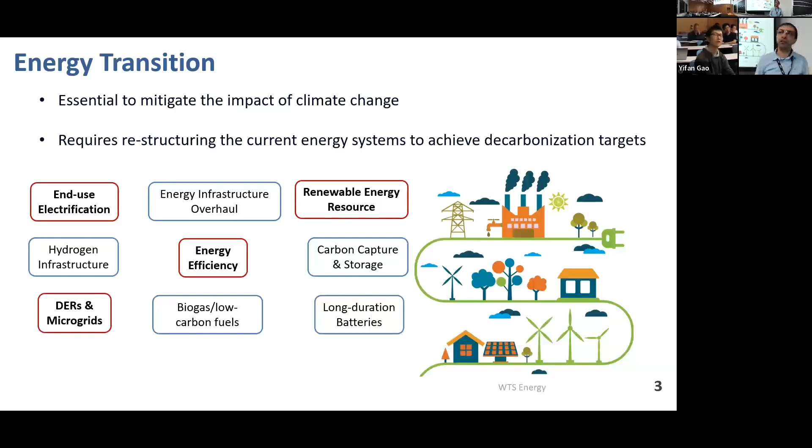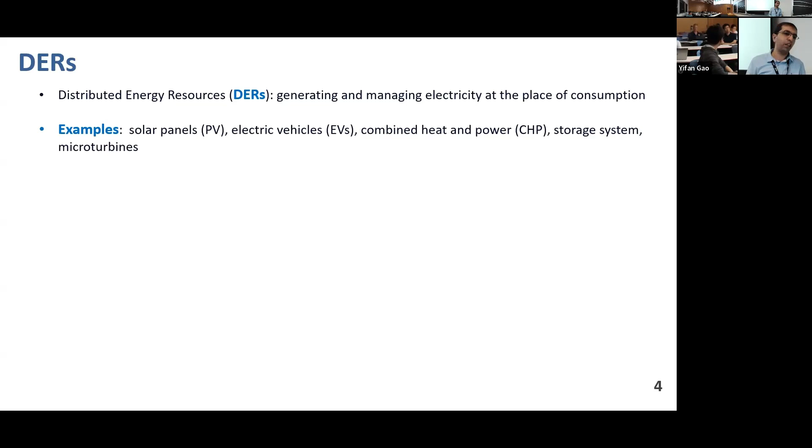So we consider distributed energy resources. DERs are generating and managing systems at the consumption point. Examples of DERs are solar panels, electric vehicles, combined heat and power, and also storage systems and micro turbines and so on and so forth. They offer a lot of benefits. They improve grid reliability and resiliency by decentralizing basically the generation of the power.

They lower the energy costs for households. Thus, they have implications for energy equity and climate justice. They reduce the environmental impact of energy generation by providing clean decarbonized power. And also they reduce infrastructure and distribution costs. By adopting a lot of DERs in households in different neighborhoods, there is not that much need to build a lot of transmission lines perhaps or generation capacities.

But of course, adopting DERs comes with different challenges. The basic one that is also the point of studies in recent years is grid integration. The market and regulations are designed for centralized dispatchable power currently. So adopting DERs is not easy. It needs an update in regulation and policy.

The other downside of DER integration is the cost, the capital cost and maintenance cost for DERs. For solar panels, we can think about rooftop solar panels; they are expensive. Without government incentives, there is not much benefit for low-income households to install, for example, solar panels. And also the maintenance cost for these facilities is expensive.

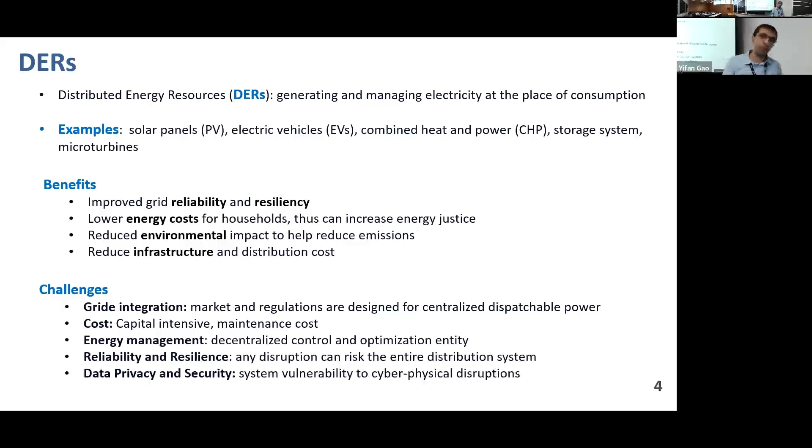Energy management is a challenge for DERs. They require their own control systems to adjust and integrate with other parts of the household to get the most out of these DERs. They also impose some reliability and resilience challenges, and also some data privacy and security challenges as well. For example, if the system is infringed by a cyber-physical attack, the entire transmission line and the grid may be exposed as well.

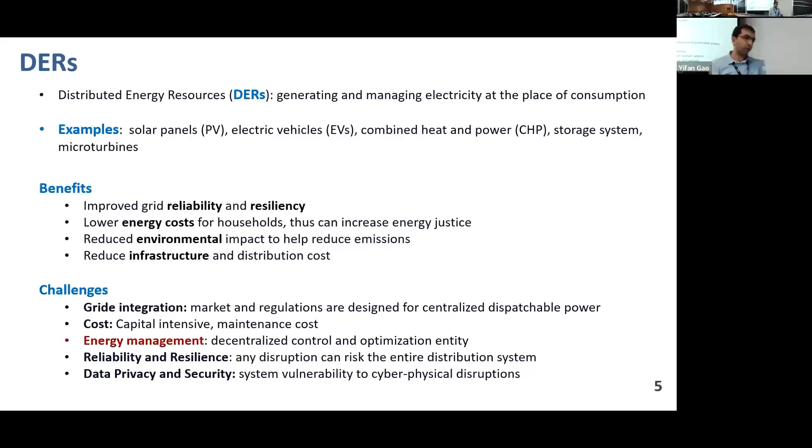So what we consider in this project is the home energy management system. We think about the smart home as an isolated entity, which has some interactions with the outside world through the main grid. And there are different aspects when we think about home energy management. There are HVAC systems. Obviously, we need to satisfy the electricity, heating, and cooling demand for the household or for the building facility. That is the main objective.

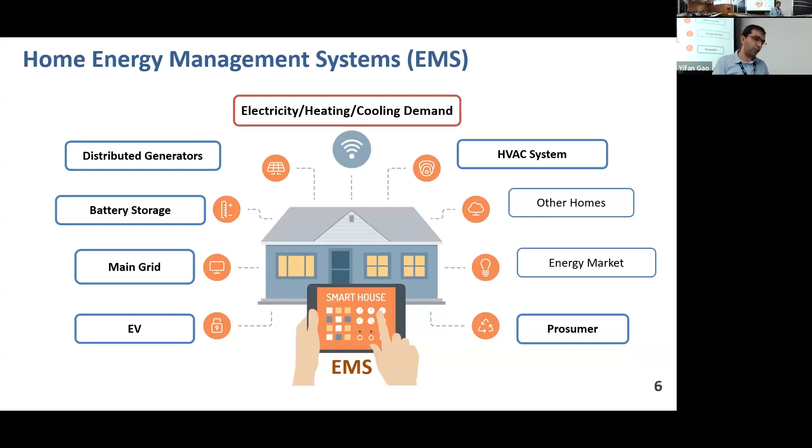And there are different aspects such as distributed generators, battery storage, main grid, EVs. We can think about this building as a prosumer. It sells and buys power from the main grid or to other households as well. There is the energy market aspect, and we can think about it as microgrids by considering other homes. What we consider in this project are the highlighted boxes here. Okay.

So home energy management systems have been the focus of many studies in recent years. Different models look at this problem from different angles. From the parameter perspective, a lot of studies consider deterministic parameters for home energy management systems. They rely on forecasting or run multiple scenarios independently. Some of them consider uncertainty by modeling this management and control problem as stochastic programming, robust optimization, and so on and so forth.

The objective mostly involves expenditure of some sort: variable cost, maintenance cost, levelized cost of generating the electricity, for example. Some environmental aspects are considered by way of emission cost; economic incentives, such as maximizing the revenue of the prosumer, is another aspect that is considered, and some studies consider battery degradation, outage, and load shedding.

From a solution perspective, some studies rely on highly stylized model-based optimization models. So these are models that we already know how to solve. We usually define them in a solver, commercial solvers, or try to solve them as an optimization problem. So they have great advantages. They provide exact solutions. They are explainable. And also they provide a lot of good analysis like the dual signals and dual variables as well.

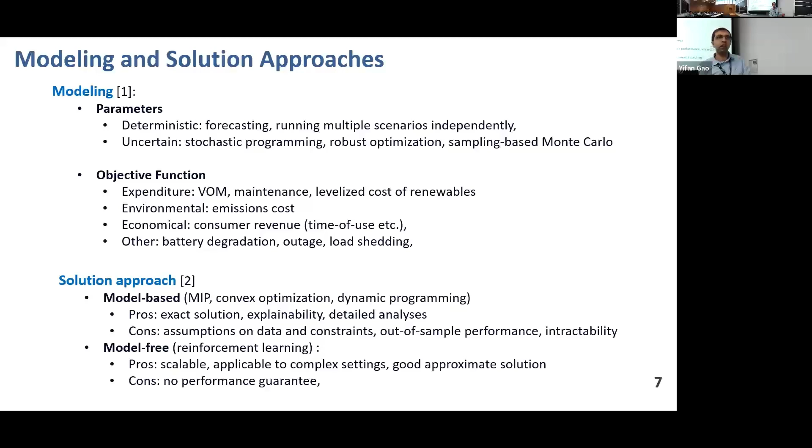So what we consider in this project is sector-coupled households and buildings. We look at the building from a prosumer perspective, and we consider thermal demand, also cooling demand, as well as HVAC and transportation by way of EVs. So different sectors of energy are coupled in our model. And we also adopt deep reinforcement learning mixed integer programming for the resulting problem. So this overall framework gives us a control policy where we can control and adjust the energy management for households and buildings.

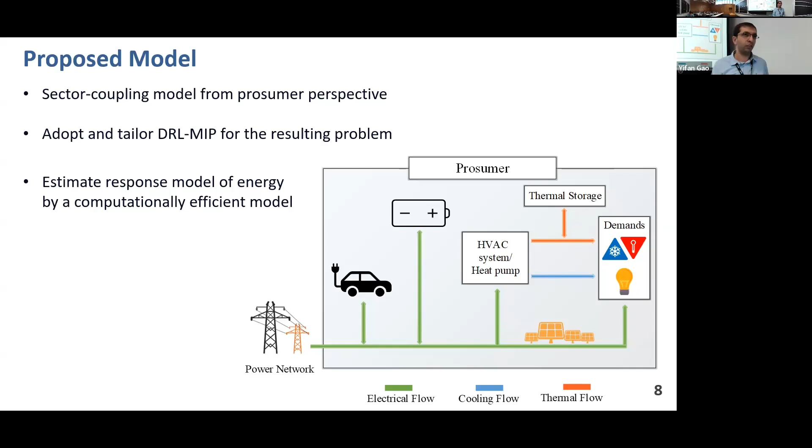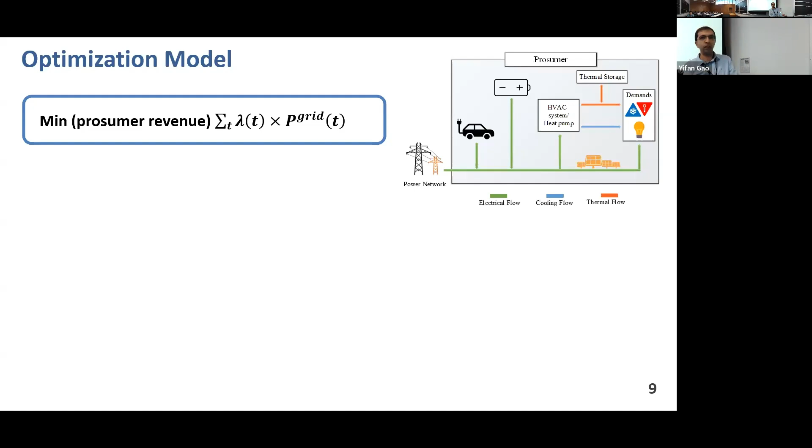Before introducing the model, I have to mention that this project is motivated by a technology company in Finland. So the objective function here, from the prosumer perspective, is to maximize the prosumer revenue. And the constraints are battery and heat storage constraints, HVAC, building temperature, and some other constraints in the problem. Most of these constraints can be modeled by some linear approximations. However, some of them, like the HVAC system constraint, are highly nonlinear, non-convex constraints.

So there are different solutions. Some studies used energy simulation tools like EnergyPlus to approximate the outcome of the HVAC power with regard to the temperature and comfort zone. Some others use approximate equations, piecewise linear, and other equations to approximate the non-convex equation. This project is still in the initial phases, so we started with a regression model to approximate the output of the HVAC. And surprisingly, it works well so far. We will see its performance in the actual setting as well.

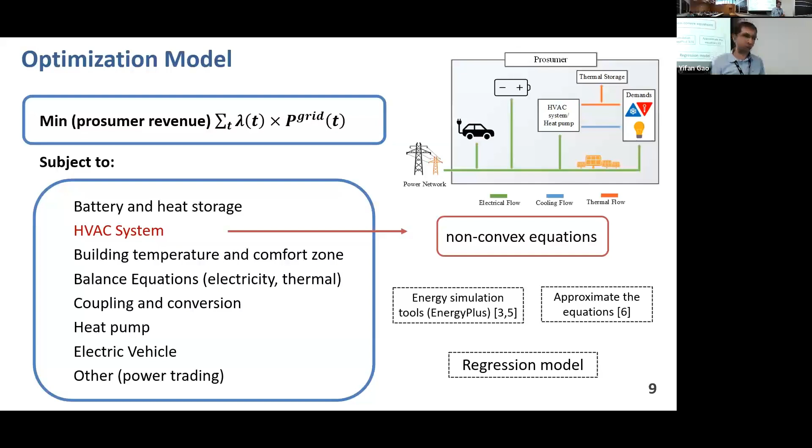So this is the optimization problem we have. We have the objective function, we have some constraints. Some of the constraints are highly nonlinear and non-convex, so we cannot solve this problem with a traditional commercial solver. We cannot define it in Gurobi, let's say, and want it to solve. What we do instead is rely on deep reinforcement learning mixed integer programming.

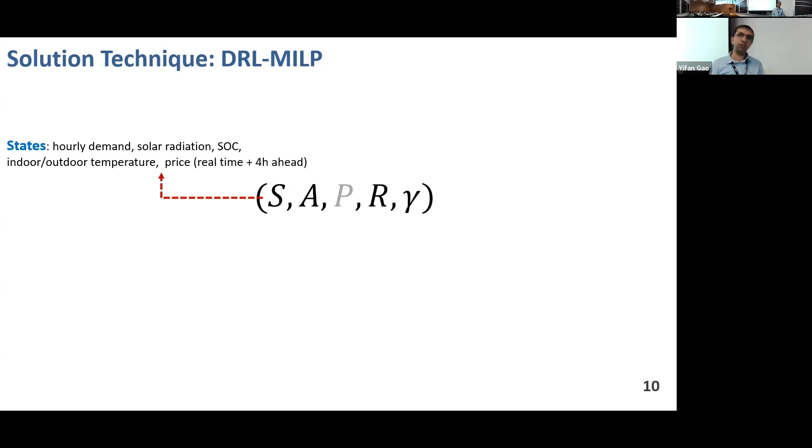So reinforcement learning is defined by a 5-tuple. The first one is the states, which we define in this study as the hourly demand, solar radiation, state of charge for storage facilities, indoor and outdoor temperature, and also price, which is given as real-time price here. Actions include battery charge and discharge. These are the actions that the controller has to make for every time period. HVAC power and the power trades with the main grid.

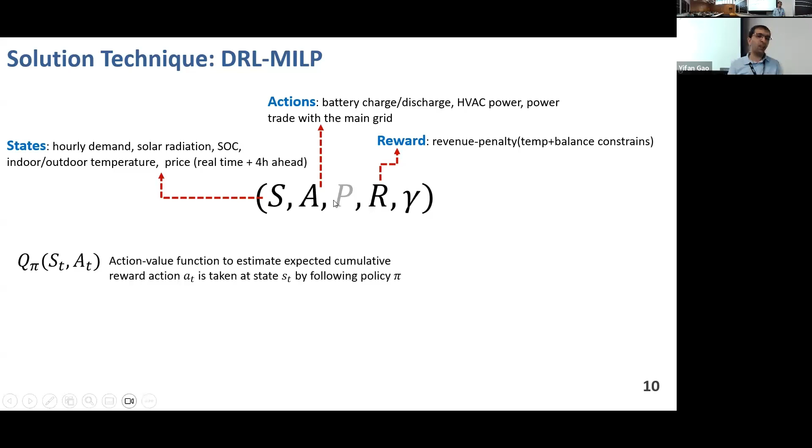For the reward, what we consider is the revenue minus the penalty for violating the temperature and balancing constraints. And also gamma is the discount factor, and there is P shown here because reinforcement learning was initially developed based on the Markov decision process, which assumes a probability of transition. So in many cases, reinforcement learning cannot be solved by dynamic programming because either the state or action space is continuous or the solution space is too large. So what is proposed is to approximate what is called the action value function.

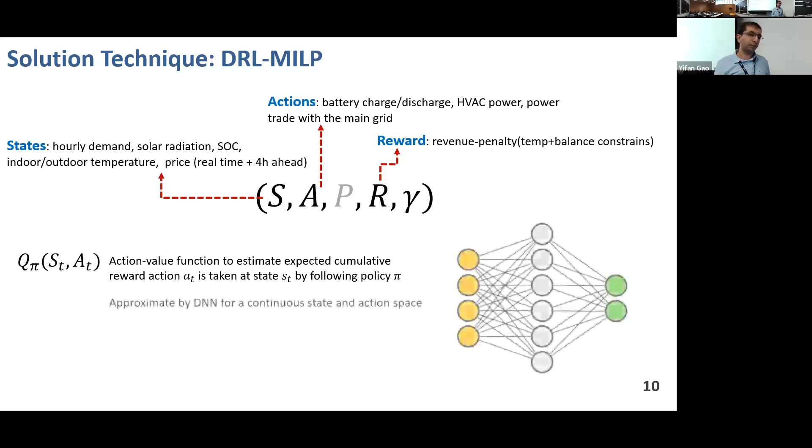Basically, this Q function is the estimate of the expected cumulative reward for action AT if action AT is taken at the state ST by following policy π. So without going into the details of reinforcement learning and the Bellman equation, in deep reinforcement learning we replace the approximation of this Q function, this reward function, with a deep neural network. And that has been done for several years now, and we also use the idea.

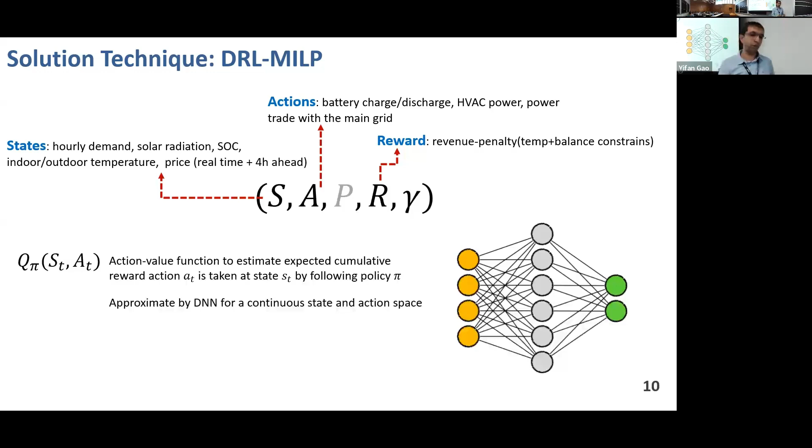So to come up with the solution approach, we adopted the solution approach from a previous study for now. Basically, it consists of two phases. The first phase is the training process for the deep reinforcement learning. It starts by defining the initial parameters for both the deep neural network and reinforcement learning, and iterates through the episodes and epochs for the reinforcement learning. So after the end of this first phase, what we have is the parameters, weights, and biases for the neural network design.

In the second phase, we take these weights and biases and formulate a mixed integer program. This has been done in recent years, not in the context of energy, but mostly in operations research, where we model the entire behavior of the neural network with mixed binary programming. The combination of the first phase and the second phase allows us to solve this nonlinear and non-convex problem approximately, not exactly, because we cannot provide an exact solution for non-convex problems.

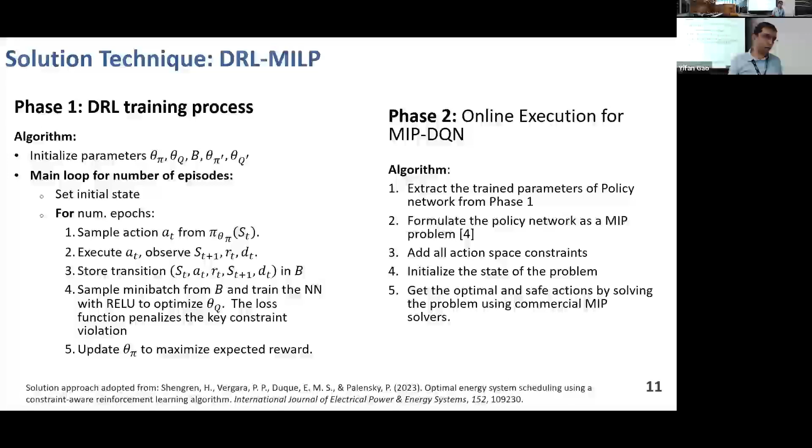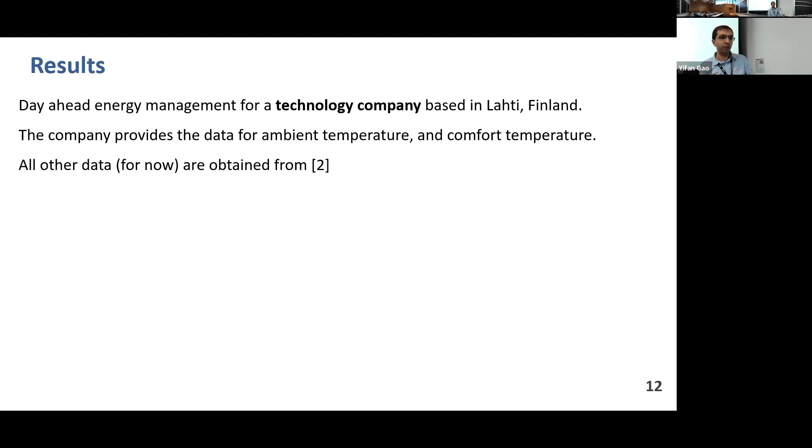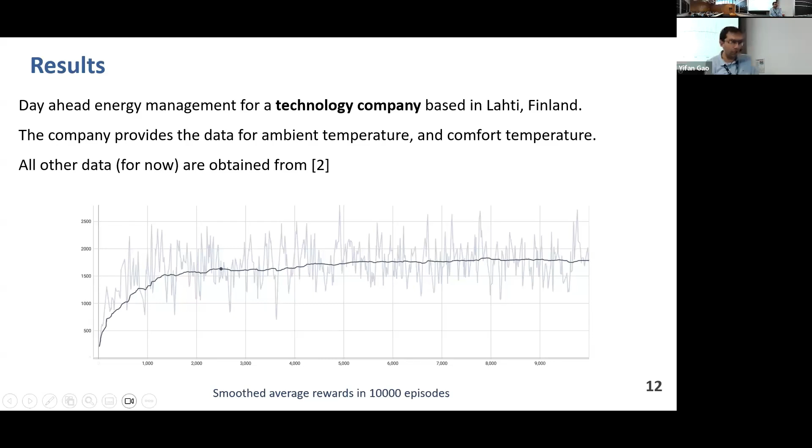For the results, it is still in the initial phases. We don't have many results, but we have a few that I'm going to show. We considered a technology company based in Finland. They provided the data for ambient temperature and comfort temperature, and all other data is obtained from previous studies. This shows the convergence of the reinforcement learning agent and how it learns how to behave in each time period. As we can see, the reward is non-decreasing, and the agent actually learns after a few thousand episodes.

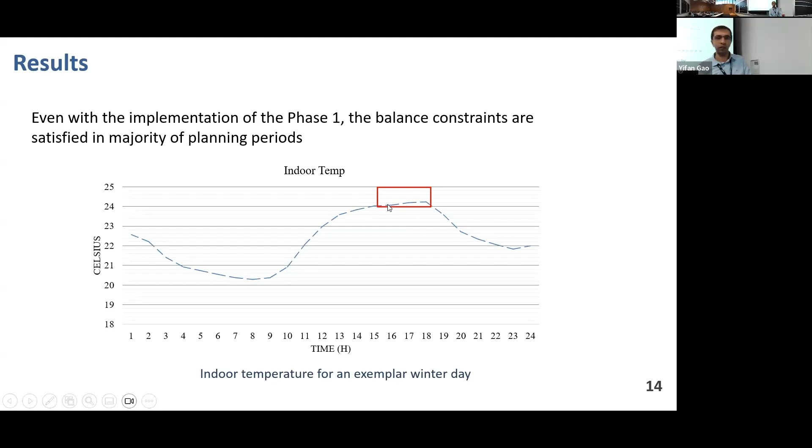A few takeaways: machine learning can help solve high fidelity energy management problems that are otherwise intractable with traditional optimization techniques. Deep reinforcement learning has the potential to provide good approximate solutions, but as we see from this project, it requires tedious parameter tuning. For the next step, we want to include heat pumps, heat storage, and flexible load for demand response. The intent is to make the framework more generalizable for other buildings and companies. Application-wise, eventually we want to deploy this framework and test it in the actual setting of the company. And some references, and with that, I conclude my presentation.

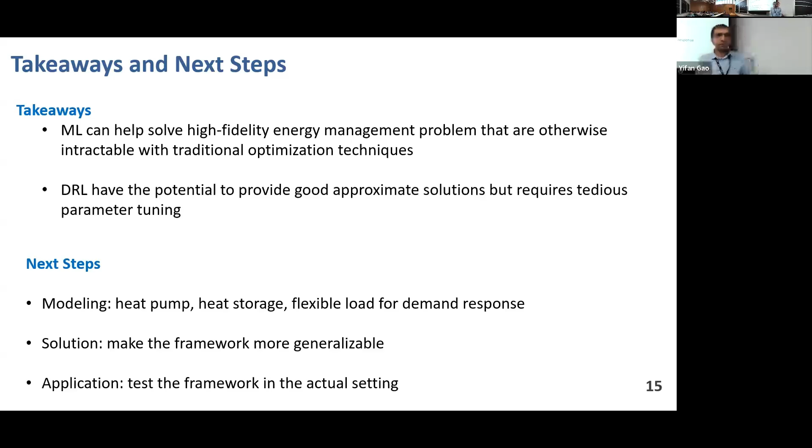All right, thank you, sir. Sure. Double check.